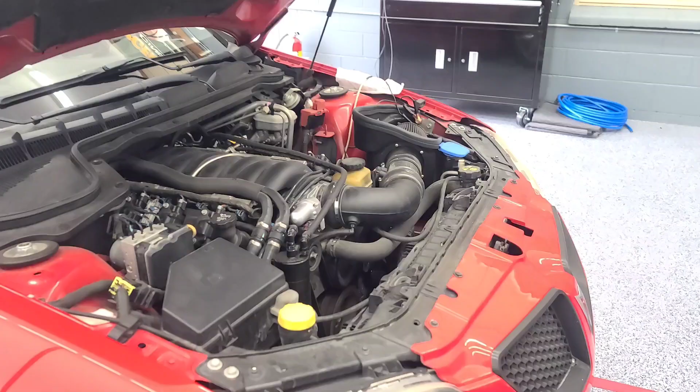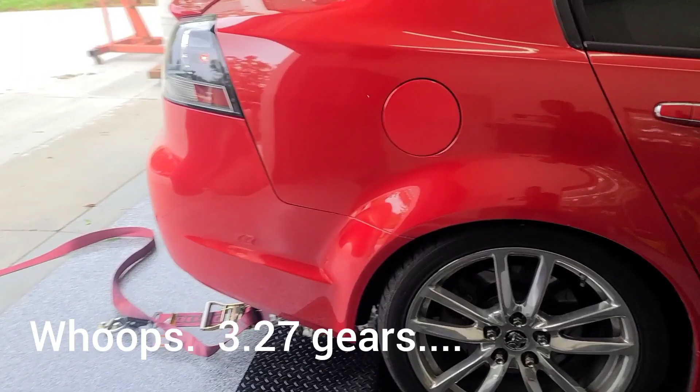It has headers, RotoFab, 3.27 gears, and it looks like a stock converter and Solo mufflers, or lack thereof. It started at 319.

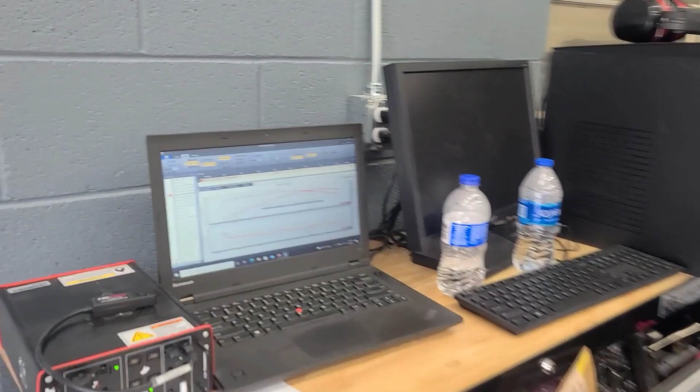I'll show you guys a pull. We're gonna make one more pull just to clear this one little spot out. It's a little rich, a little lean right there. Really wouldn't matter with this car, but pretty particular on stuff.

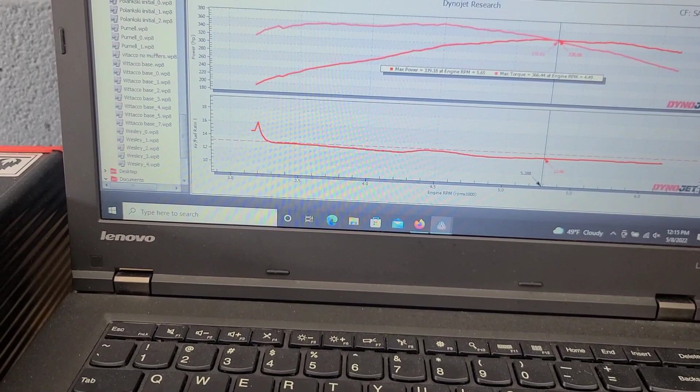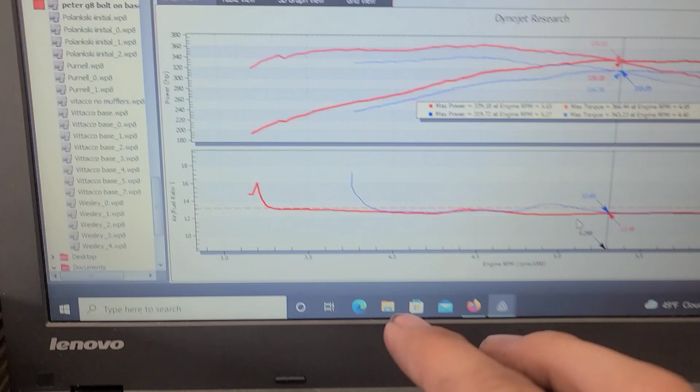Here you can see so far we picked up 20 horsepower and over 20 foot-pounds of torque. As you can tell, the air fuel, the red is the current one, much smoother, where the blue had a little bit of bouncy action in there.

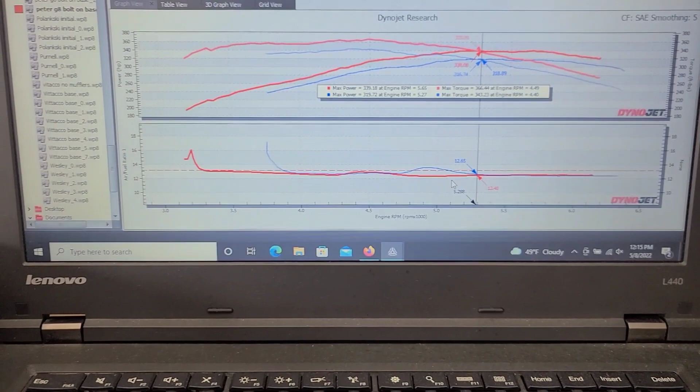It wasn't bad, but we're able to squeeze a good amount of power out. 20 horsepower on a stock cam G8 is pretty good. You can tell the power starts after 6,000, it starts going down pretty good. Holds a lot better now, but it's still going down.

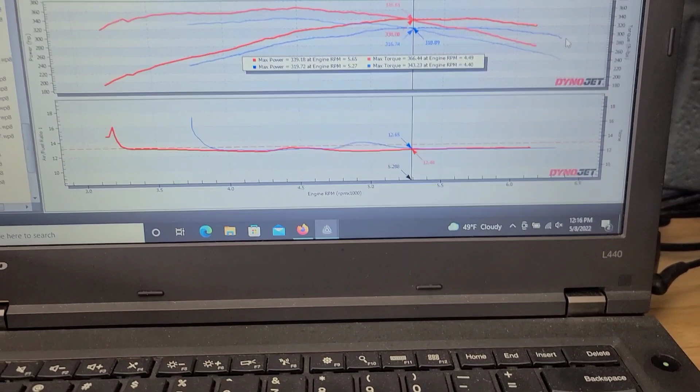So we'll get a video of this, and overall looks like you can get about 340-ish out of a bolt-on G8. Pretty good, that was actually a little more than I was expecting. So we'll get a little idle and rev video and video this last pull for you guys.

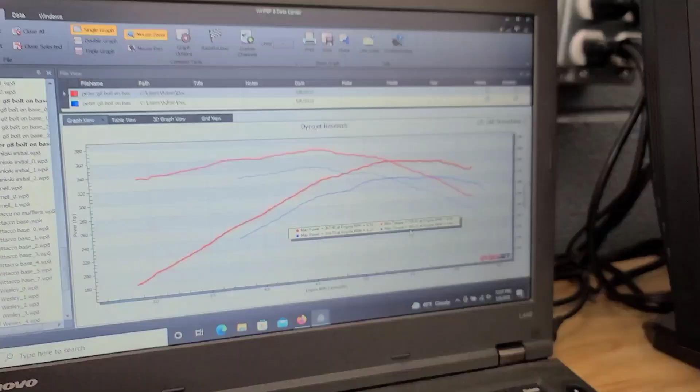All right, so it looks like we ended up at 347, and started at 319. So a gain of 28 on a stock G8. Pretty happy with that.

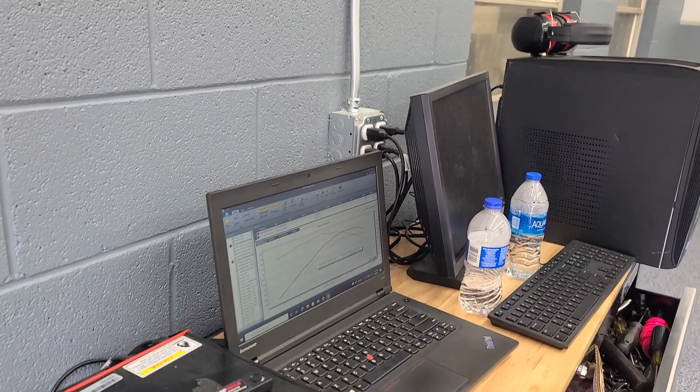All tuned, we didn't do any work on this one. And the fuel graph, as you can tell if Dusty pulls that back up, is much better. There's the air fuel ratio, we didn't have that big jump, and it's real nice and smooth.

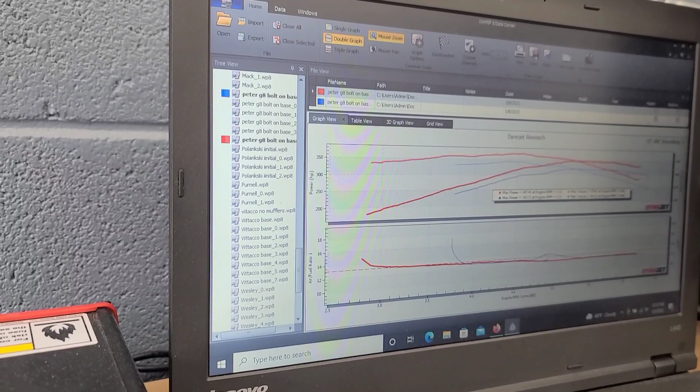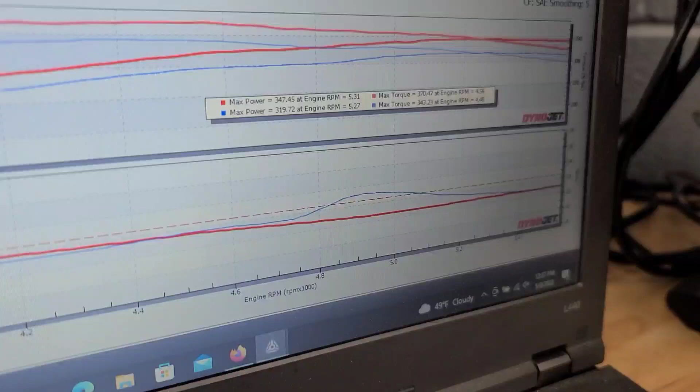And as it increases in RPM, it ridges up. So everything is exactly what we want to see. It had a terrible bump before. So we're good, we can go do a little bit of street driving, make sure it's good, and Peter's ready to come get it.

This one has headers, the Solo mid muffler, and then the Solo J-pipes. So just a mid muffler on this one, and a stock or stock-type cam to get rid of the DOD. I'm not exactly sure of the specification, but I know it doesn't have any kind of aftermarket performance cam.